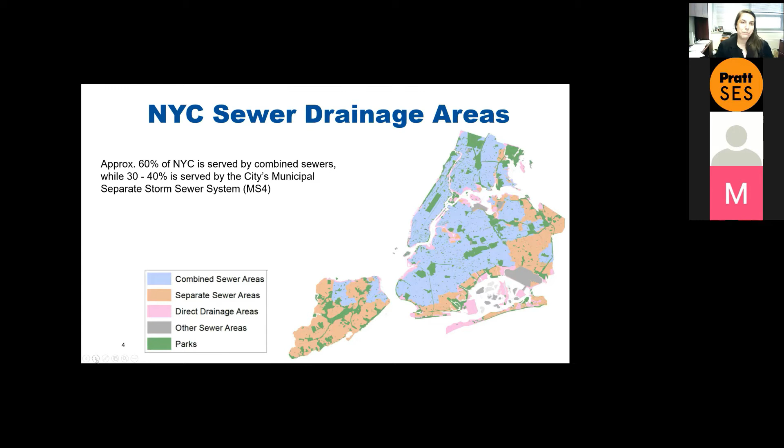And then when you think about the separately sewered areas of the city where stormwater is discharging directly into our water bodies, our goals there are really treatment of stormwater. So we want to make sure that the water entering the city's storm sewers is filtered and has reduced pollutants than would happen if it's just discharging directly to those water bodies. There's a lot of cities across the country that only have to deal with one of these issues, and maybe they only have one or two water bodies. We're lucky here in New York because we get to deal with it all, and we have several water bodies. Makes the work more challenging, but it also makes it more exciting, I think.

So thinking about those two objectives and our different drainage areas, I would just want to briefly say, we have stormwater rules on the books today. The separately sewered areas of the city have stormwater construction requirements, and this is a program that DEP inherited from the state back in 2019. And so projects that disturb 1 acre or more of soil need to comply with the DEP stormwater construction permit. There's requirements for erosion and sediment control during construction. And then there's requirements for runoff reduction and post-construction stormwater management practices that need to be implemented, to handle stormwater once your project is constructed.

And so those projects are regulated under DEP regulations, chapter 19.1, and they're currently following this stormwater manual you see here with the Statue of Liberty on the cover. You often hear us refer to those as our water quality requirements, and you'll hear that through the rest of my presentation. So then, even before we inherited this stormwater construction permitting program from the state, we've always had certain requirements for projects that need to connect to the city sewer system. These are regulated under DEP rules, Chapter 31. You hear us talk about these as the stormwater quantity and flow rate requirements.

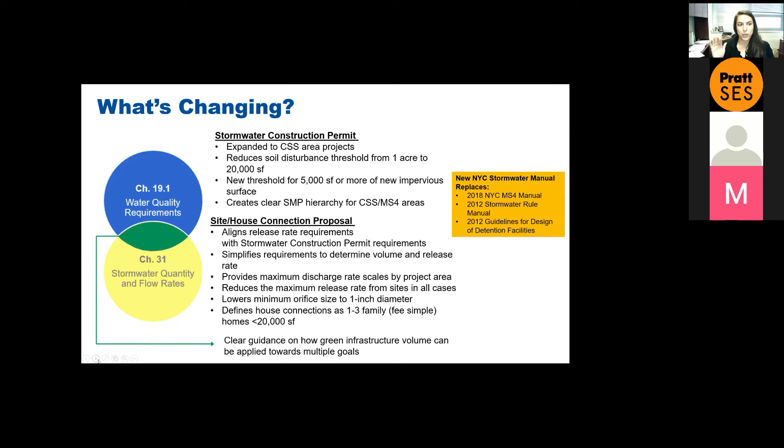And then finally, where you see the blue and the yellow circles overlap, there's a little green segment. And that's to signify that we finally provided the design community what they've been asking for, which is clear guidance on how you can use green infrastructure volume to meet both your water quality requirements, which is pretty intuitive, but also your stormwater quantity requirements, which takes a little bit more maneuvering.

So then I'm going to switch to the manual now, but I just wanted to briefly share this overview that hits home again on the different components of each of these permitting programs. So when we talk about the stormwater construction permit, again, this is the program we adopted from the state, and it's not just building green infrastructure. You're doing erosion and sedimentation control during construction, because in the city, this is huge for us. We see a lot of construction activities where stormwater is being allowed to go directly into our catch basins or into streams uncontrolled. And so the point here is to make sure that stormwater is being managed properly during construction.

And then the next three really get to post-construction. So your water quality goals are met by having stormwater management practices that can manage runoff from the small frequent events that trigger those water quality impacts. You also have runoff reduction requirements, which are intended to make sure the city is performing kind of like how it used to before it was redeveloped, right? So that's the whole intent, to really get these properties to perform better than just a completely redeveloped property. And then we have no net increase requirements in MS4 priority water bodies that are also included in this stormwater construction permit.

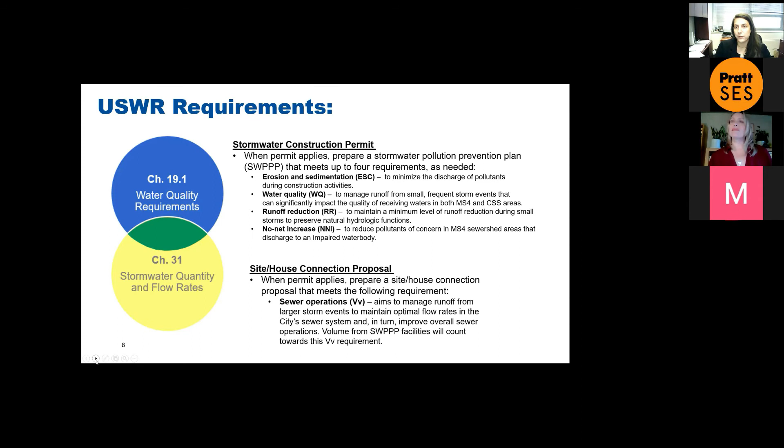So shifting into the new manual, this is my favorite part of the presentation, because we spent a lot of time working on this manual.

We looked at a lot of other cities. We had a great consulting team. We landed on a manual model based off of the city of Los Angeles. And so they approached their manual with a very kind of like: define your performance objectives, and then lay your manual out that way, so that people can say, based on my site, I know I can implement an infiltration practice, and then they can just kind of follow along and do that.

So this manual is replacing the 3 manuals that are on our website today. And I mentioned these already. So this new manual will be all encompassing, and it replaces those. It has 6 chapters, and I'm going to just briefly mention these because I'm not going to be able to present on all of them, although I would love to. But chapter 1 is just the introduction, and it kind of tells the story of how and why we're aligning our regs. Chapter 2 goes through great detail on what the actual requirements are for both chapters.

Chapter 3 gives the development and review requirements. It's basically like the workflow for the projects that trigger both chapter 19.1 and chapter 31. And then if you trigger chapter 31 only, you get kicked out to our website where all of those site and house connection proposal applications live. If you trigger chapter 19.1, you go through the rest of the manual and everything in the manual is required.

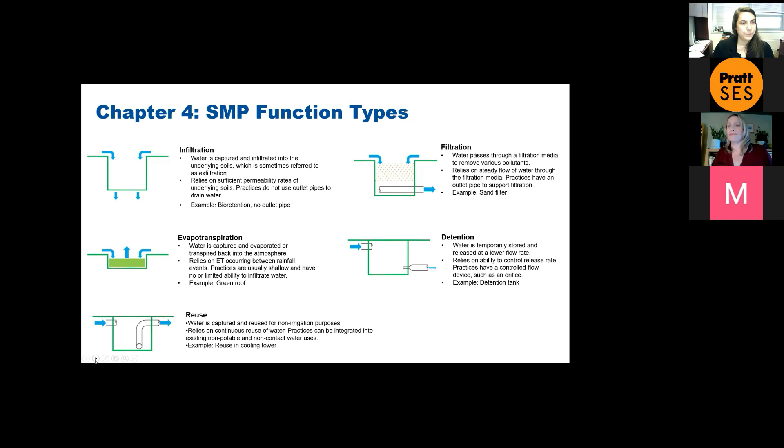But if my geotechnical work comes back and my soils are bad, I can just quickly redesign it to include an outlet pipe so that it can take advantage of the poorly draining soils and get the stormwater back to the city sewer system if the practice fills up. So that was one flexibility we wanted to include here, because we are mandating retention where possible. And so we needed to make sure that we had some opportunities for flexibility in design.

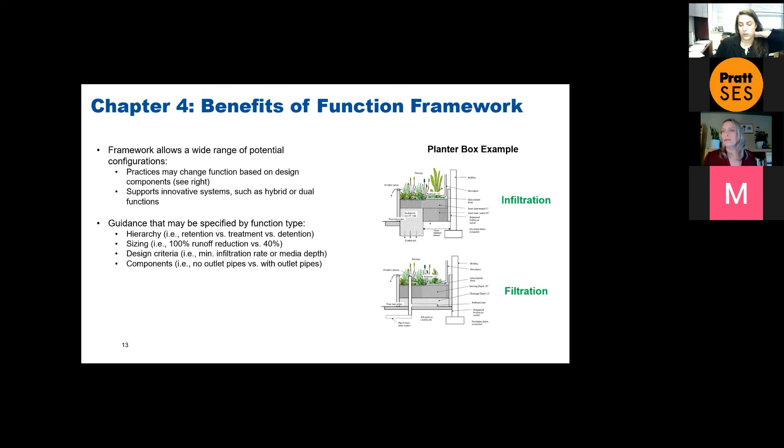The other thing we did too, we included innovative systems in our manual. And this is something that a lot of designers have asked us for. It's hard to plan out every type of combination system that might be feasible. And we also don't want to over-prescribe design, because there are a lot of super smart designers who have been doing green infrastructure for a really long time and they get it. But we wanted to give a couple examples of where you could have a dual function system where one practice is configured to support two functions.

So we have this example here of a filtration/detention system, or an infiltration/detention system. And what this does is, yes, at the end of the day, it's a detention practice, but at the same time, you're still taking advantage of that natural component of green infrastructure. You're getting some infiltration, maybe through perforated pipes, or you're getting some filtration where stormwater is being filtered through a media before it goes into the city sewer system.

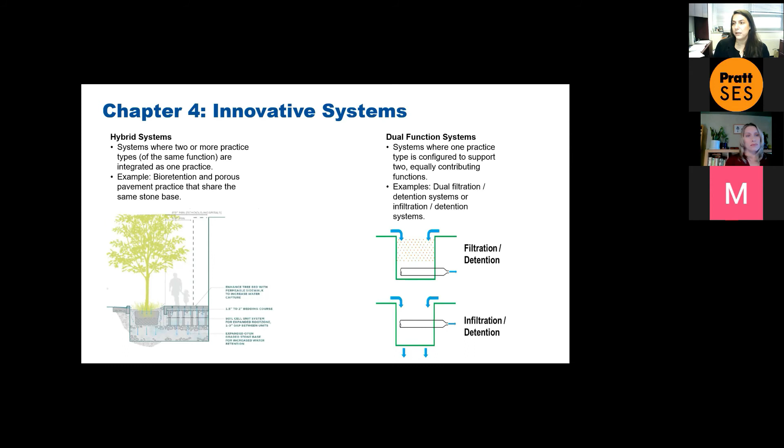So in both cases, these are adequate, and these are important ways to approach a project, and we wanted to lay that out so that people knew it was acceptable. And again, we do this in the GI program all the time. If we don't have great permeability, we still want to take advantage of the parts of the practice that can infiltrate, because that's the best thing we can do, is to keep whatever amount of stormwater out of the sewer system that we can.

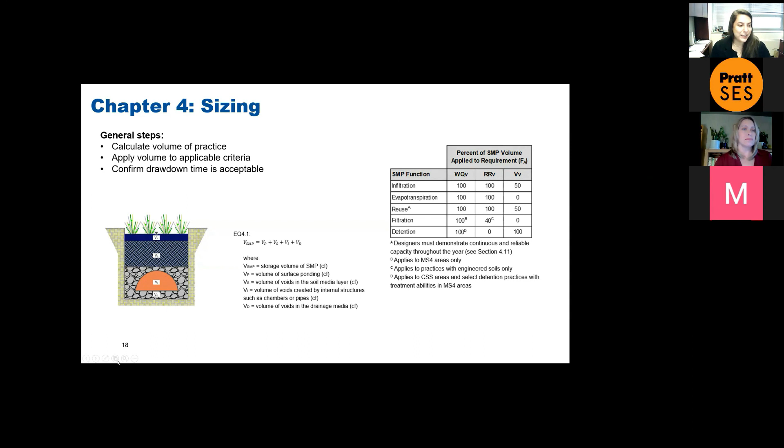And then the next two slides, I'll just go over these really quickly. We have, again, more design tables for our practices based on function. In the GI program, we get this a lot too: what's our max loading ratio? And we used to never say these things, because we wanted people to demonstrate on your property what you think the max loading ratio should be. But for this, we had to set it, because these are for stormwater regulations. And we have some requirements that we've adopted from the state, and we have to translate those.

So we set max loading ratios for all of our practices. We set max contributing area. We have the infiltration rate you need, the surface ponding depths, the depths of your stone base. That's something we get asked a lot. And we have max drawdown time as well. So those are.

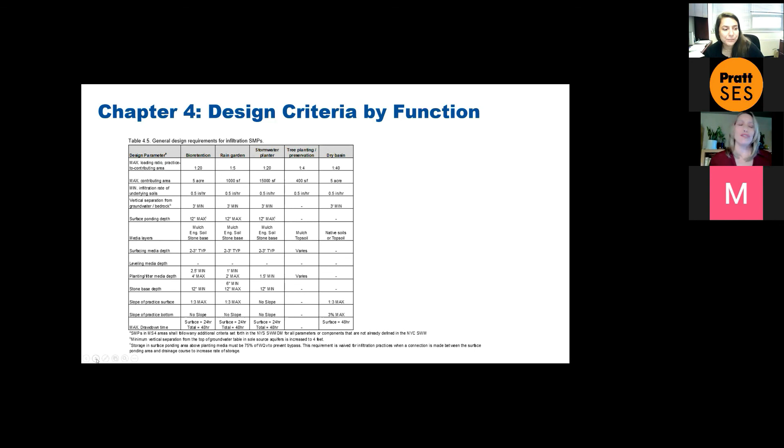Melissa, sorry. We want to wrap it up so we have time for some questions. Sorry, hon. Can I just go to the last slide? Well, okay. So yeah, just final thoughts here.

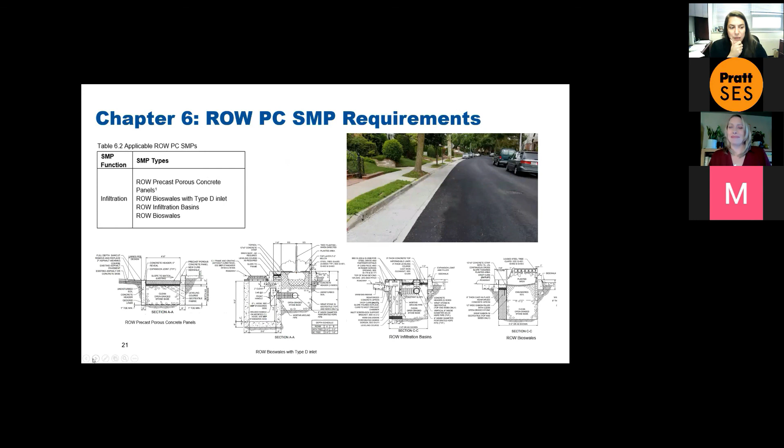We've laid out our right-of-way stormwater management practices. I know this is something that is a little confusing to people as they read, but I think these presentations will be available and you'll be able to see it. And then lastly, when are the rules going to be effective? They will be effective in 2 weeks. So the week of February 14th.

And the draft rules in the manual are already on our website. We've submitted the final rules to the City Record. So they will be published and effective early February, or we're in early February, but 2 weeks.